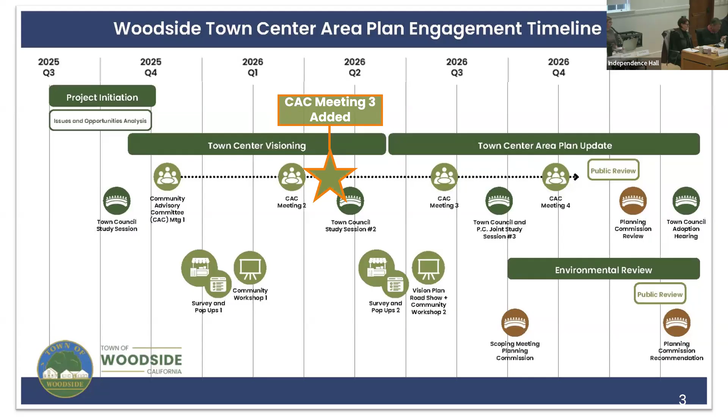Daniel: So I have one topic that I feel is a bit of a miss for this list that I wanted to put in front of the group. I attended one of the council meetings in January, and an organization called LAFCO, an arm of San Mateo County that audits the health of the towns and cities, presented on the health of Woodside.

On the financial side, our budget is about $12.5 million a year. 51% of our budget comes from property taxes, which is really unusual in the county—that's normally 15 or 20%. There's not a lot we can do about that revenue source. Our next biggest revenue source is permitting and fees. We have very little sales tax, very little business taxes, and no hotel tax that most other towns make a lot of money on.

So why do I bring this up? Well, our police services cost $3 million a year and are projected to grow way faster than our town revenue. LAFCO raised an alarm that by 2030 we may be looking at a $1 million shortfall in our budget, which is kind of where Portola Valley is right now, where they're in financial trouble.

So the question I had is: should one of our desired outcomes or goals for the town center project be to focus on having the town center generate revenue for the town as a priority? Is that a way to close that gap that's inevitably coming—if not in the next four years, certainly within the scope of this project?

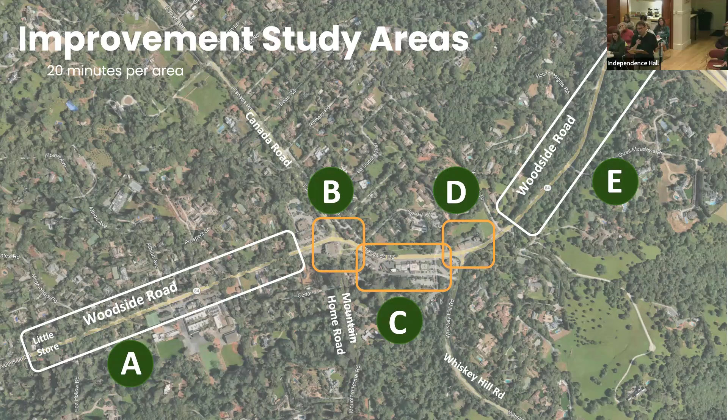But we'll start off with West Woodside Road, Section A. Important thing to keep in mind, and Sage mentioned this earlier, these are long range ideas. There's a whole process before anything gets implemented where they survey, look at where the utilities are, where the property lines are in great detail. There's a whole public process that goes with actually implementing these ideas.

But we've put together vision concepts—the big idea—and we'll decide which of those seem to make sense. Projects are ideally funded by grants, town public works capital improvements, or Caltrans. We are trying to keep investments from falling on private property owners. Implementing these will require additional analysis, review, and sign-off by Caltrans. And we want to partner with landowners as much as possible to facilitate ideas that work for everybody.

So we'll start with Western Woodside Road, which spans from just past Little Store, past the church, all the way up to Roberts. It's an interesting stretch of road—you have 2 different conditions for the bike lanes, a varying condition on the sidewalk on the south side, and the shoulder takes all kinds of different forms on the north side.

Like Woodside, it's very unique, so it'll have to be studied block by block in a lot of detail. But there were some sensitive areas revealed when we talked to the community, and that really pertained to the school, the little store, the church, and coming up to Roberts.

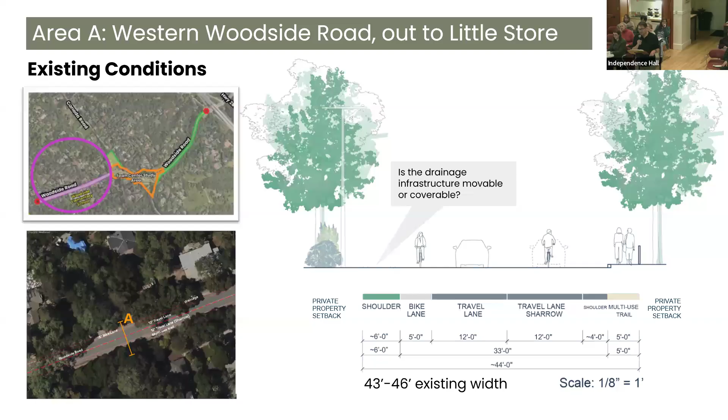Right now, it is somewhat of an unsafe environment for the elementary school students. Vehicles at times do go over the speed limit and speed down this corridor. And there's a lack of parking for the commercial uses at the church and at Little Store.

Some of the CAC feedback we had before was that elementary students, pedestrians, and bicycles were tied up as the top priority to fix. And we want to really fix the speeding issues along that stretch of road.

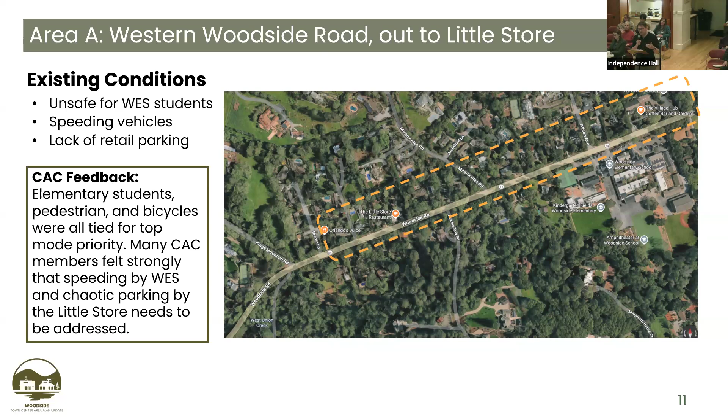Some of the broad ideas here start with the pedestrian experience. How do we improve things on the north side, and then how do we improve things on the south side of the street? In some areas around the school, things are already fairly nicely improved, but heading west from the school, things get a little irregular.

So we're looking at really formalizing the pedestrian and equestrian improvements along this corridor: enhance the existing path on the south side, and look for opportunities to create a new multi-use path on the north side. In and around the school zone, we have a couple of different concepts that are additive — you can do all of them or just some.

For traffic calming, your city has already done quite a bit to start, with high visibility crosswalks, rapid flashing beacons, a bike lane on one side, the posted speed limit, and we noticed tonight there's a speed check digital readout, which is really great and very helpful. So the first concept is to bring it up a notch.

Narrow the lanes to 11 feet wide, which is not an uncommon dimension for vehicles to travel. It narrows up the feeling of the road a little bit, so people tend to drive slower in those environments.

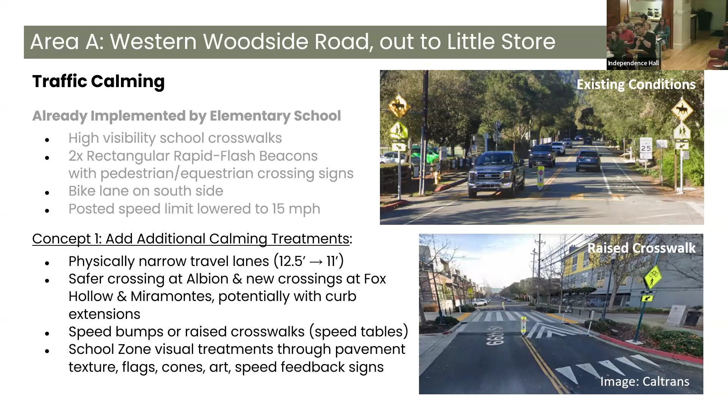Concept 2 is to really formalize the multi-use trails on either side of the road. This will take careful study on the north side to look at where the power lines or power poles are, where there are big trees or not, and the drainage. That would take a lot of study, but it would be a great long-term goal for the city to achieve pedestrian safe travel on both sides of the street.

The south side, on the side of the school, is actually quite implementable — it's not far off from where it is today. So I think that's a good thing.

If we can buy ourselves some space, take some space away from the cars, and get two dedicated bike lanes — it wouldn't be for the entire length because there are some really old trees that encroach and narrow the roadway. But beyond those trees, closer to the school going west, if we could implement dedicated bike lanes, a cyclist would have a symmetrical street layout — they'd know they're going one way on a dedicated bike lane and coming back on a dedicated bike lane. It's just a clear use of the street for them.

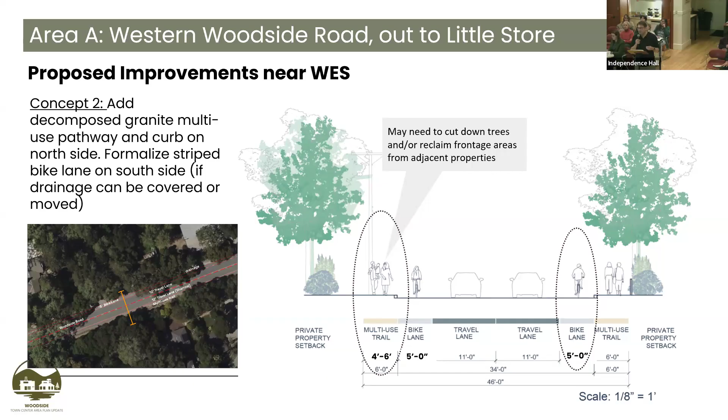Little Store is a great asset for the community, providing services without going all the way into the center. Right now there's a nicely defined parking lot off the street, but there are some ambiguous zones on either side of the store that could be parking — or maybe not. There are wood stumps, signage that says no. So going through a process to really define what legally is in the public right of way, what can legally be used as parking for the store, and trying to make it easy and safe for cars to park, while also dedicating space for bikes to travel in dedicated bike lanes, would be a worthwhile effort to clarify all of that.

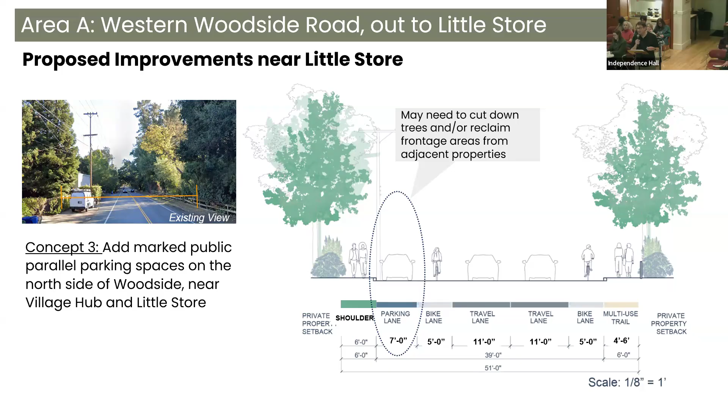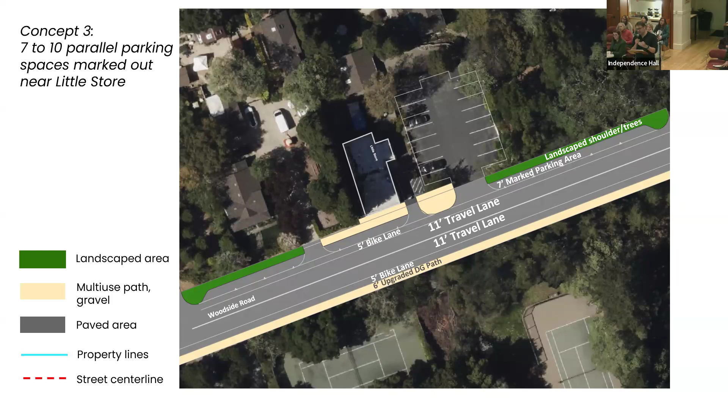So this shows in plan kind of what we're thinking. Little Store's there in the white outline with the parking lot to the right, and just creating a more formalized sidewalk or path environment. Have clearly defined parking, and then narrowing the travel lanes to 11 feet gives room for a 5-foot bike lane and 6-foot upgraded DG path on the south side. Next slide.

So before we jump into the next session, I thought it'd be good to hear from all of you on this. What are people's initial reactions to the concepts? Share with us what you're thinking. Carly.

I'm all for anything that makes it safer for pedestrians and the students and bicyclists and stuff. I do have a question from one point on one of the other slides. It said implemented was posted speed limit lowered to 15 miles per hour. Is there an update about Caltrans and lowering the speed limit near school?

Not yet. Yes, Louis, I'm Public Works Director. The request to reduce speed on Woodside Road in front of the elementary school was submitted to Caltrans. I'll be meeting with Caltrans on Monday and get an update on that, but we did submit that request.

Yes, go ahead, Steve Lubin. Yeah, I mean, I wrote this in my letter, but I'll try to do it quickly. Your diagram shows a 5-foot bike lane immediately adjacent to parked cars, which is really dangerous. And not sure there's actually enough room for bike lanes in this section. And the existing path near the school is really a sidewalk. It's not, state and federal standards call for 12 feet of width for shared paths that are two-way.

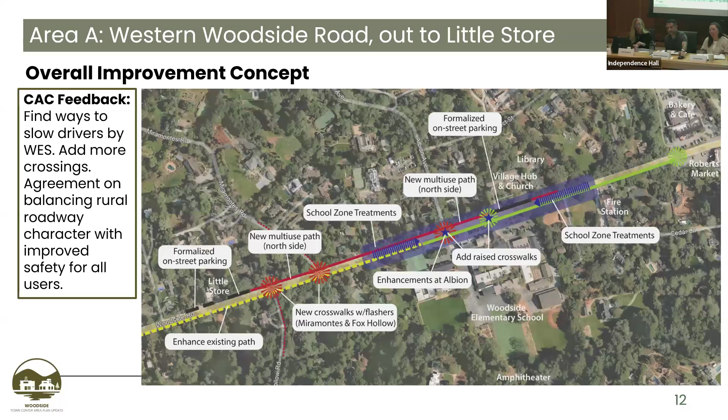Excellent. We'll keep going then on to area 2.

Oh, really quick, Troy, do you think we should do the vote? Yeah, just out of curiosity, do a quick show of hands for everyone that supports the north side path.

We can do a priority list, maybe. Yeah, it's just interesting to see. Totally, $5 million, right, it's a maybe. Well, absolutely, okay, that's good feedback.

I think we have pretty good support for the first concept, the street calming and slowing down. How about the last idea, the marked on-street parking? How many hands for that one? Most. Great, okay, perfect. Thanks, guys.

All right, next area: Woodside Road, Cañada Road, Mountain Home Road. This is one of the major arrival points in the town, and it's a slightly organic intersection. I think 100 years ago it was probably a lot slower and easier to navigate, but there's a lot more traffic now that doesn't necessarily live in Woodside but goes through this space, so there's quite a bit of activity here. We're looking at a way to create more visual clarity for pedestrians, motorists, bikes, or horses on where they should actually be in this zone. Let's go to the next slide.

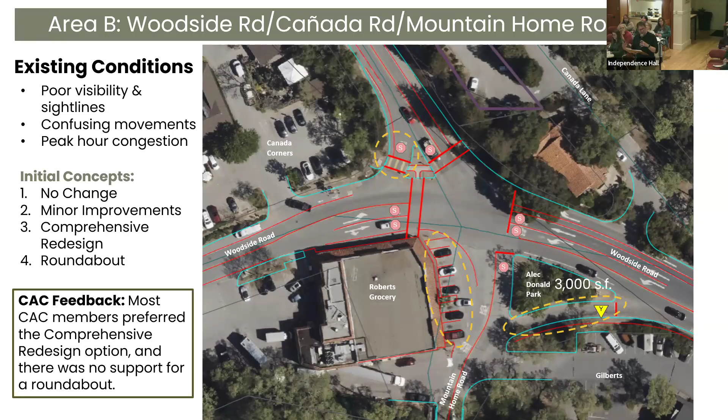We discussed some initial concepts in our last meeting: leave it alone, minor improvements, comprehensive redesign, and a roundabout. The roundabout was not popular; comprehensive redesign was. So we moved forward with different ideas for a comprehensive redesign. These aren't complete, finalized concepts—they came out of discussions with all of you, and we should beat them up tonight. Some of you have already provided really constructive, helpful comments in your emails, so let's keep those going and talk about them. Next slide.

The first one is a minor configuration, with some optionality. One thing very clear from the community outreach was people weren't excited about the slip lane off Mountain Home Road—as you get into that lane and make a right, you're still worried about traffic coming down Woodside Road. So making the right turn only happen in one spot, where Mountain Home touches Woodside Road, seemed like a consensus move. It also opens up a lot of land, since we're taking that square footage where the slip lane was and can now orient it for pedestrians or public space.

What we have here is option one, where we leave the center line of Mountain Home Road alone. Traveling Mountain Home is the same as today, but on either side we've clarified where pedestrians belong and where cars belong by creating well-defined sidewalks. There's a loss of a couple parking spaces right in front of Robert's Grocery, but we put them across the street and added one.

We've also added crosswalks connecting an expanded Alec Donald Park, which doubled in size from about 3,000 to 6,000 square feet. Now we have crosswalks carrying pedestrian traffic along Woodside Road all the way to the corner of Robert's Grocery, where they can cross Woodside Road over to Cañada Corners—a simple, no-brainer pedestrian path, which is what we're shooting for. And where Mountain Home Road engages the parking access for Gilbert's, we've created another crosswalk, so there's a nice pedestrian loop.

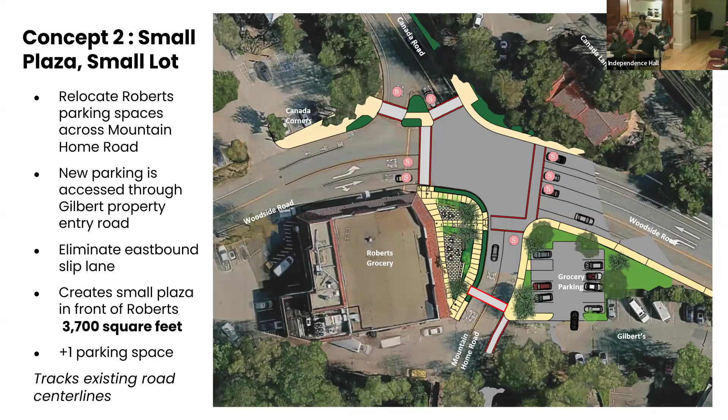So this is just a quick sketch of how that would kind of feel and scale. It's not insignificant in size for a retail environment plaza. Sometimes having something that's a little smaller can actually make it feel a little more bustling and vibrant. So that's kind of the concept there.

Some of the challenges that were noted with this is now the carts are going across the street, and that's the big obvious one that's quite problematic.

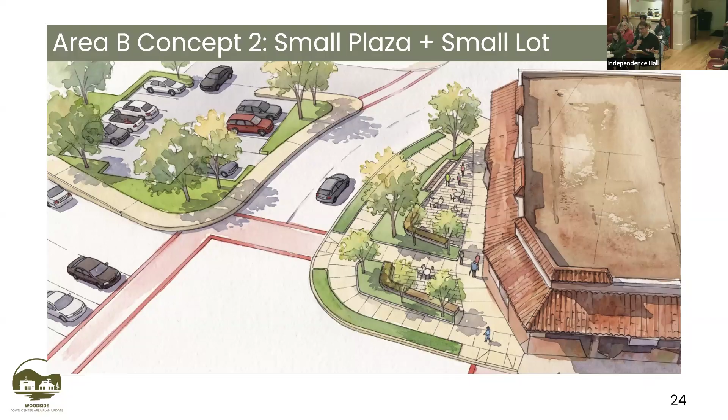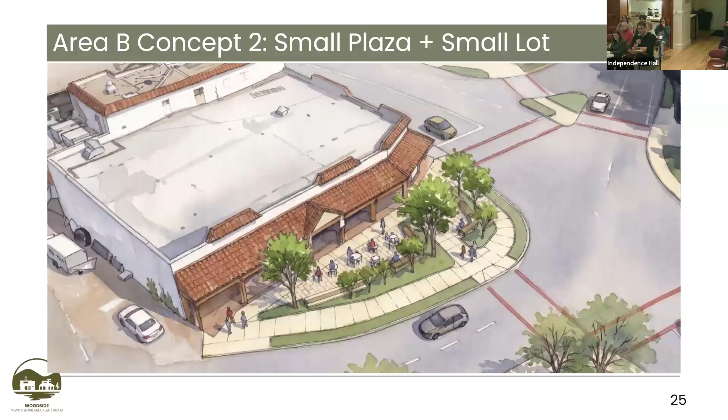So next slide, and this is a different view of that. Again, the idea behind this scheme, the previous scheme, was if we're not changing street alignments, maybe these are a little easier to implement. But the next one, we tested that theory based on some concepts that Steve provided.

And then Alta, our transportation consultant, took those ideas and worked with some of the constraints that we revealed. So this was a concept where Mountain Home Road actually curves - imagine widening the slip lane. We take the slip lane that's there, widen it into a two-way street, and then align it with the Cañada Lane intersection in terms of creating one crosswalk, one simple intersection there.

And then the interesting byproduct of this is you create this Alec Donald Plaza that's about 6,000 square feet, so it's double the size of the previous one. And then you really tighten up the intersection where Cañada Road and Woodside Road come together, so now you've got just a very simple T intersection. Traffic movements are much simpler there, and the pedestrian crossing zone gets much smaller.

So we're able to move the curb out, and the area that says landscape on the right side of Cañada Road is a substantial expansion of that land area there. So there's some interesting opportunities in terms of people arriving at Cañada Road - there could be a really great signage moment at the park. The landscape area on the other side of the street, they start to create a gateway on both sides of Woodside as you enter the commercial core. And so let's go to the next slide.

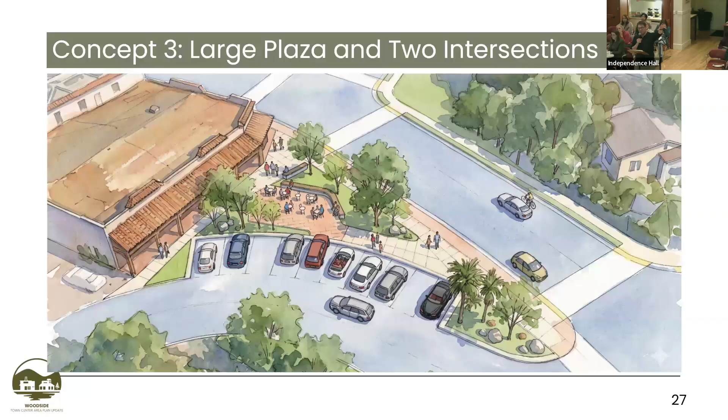So just to give you an idea of how this feels in 3D, this one retains the pull-in parking, just off to the side instead of directly in front of the store. It introduces a second stop sign and intersection, so you'd have Cañada Road and Woodside Road, then Cañada Lane and Woodside Road, both with stop signs. This works with the idea of slowing down traffic on Woodside Road up to Whiskey Hill. That's the other view looking from Cañada Road.

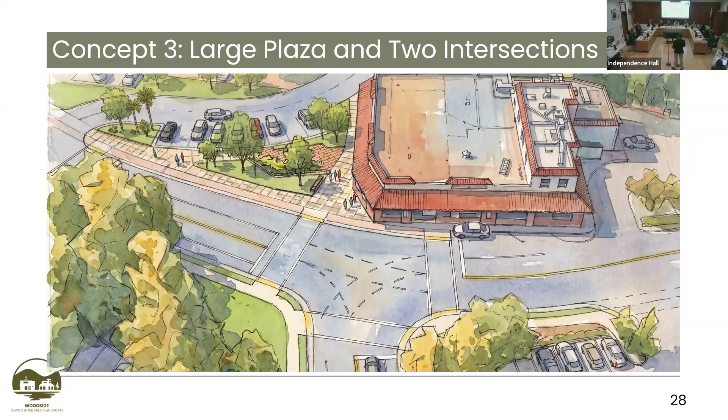So these are the three options next to each other. Concept one is about 6,000 square feet, across the street. Concept two has the Plaza hard up against the Roberts Grocery, but no changes to the street alignment. Concept three is a major surgery where we reroute the road, but reveal the opportunity for a large plaza directly adjacent to the grocery store, and also maintain the pull-in parking.

When I'm looking at this, I can't stand it, by the way. I'm thinking about this serving a lot of people that don't live here. This is the people that live in Woodside. To think there'd be a big park there with people throwing their paper down and their sandwich they didn't finish eating and all that - to create something like that in the middle of town, you think that's a nice thing? I don't. I just don't. I think it's stupid. Sorry.

I'm not sorry. Public open space does exist in a lot of towns. But where I'm going with this is you're absolutely right, they require a lot of care, maintenance and attention. They're not free, they require a yearly budget, you have to take care of them. There's a lot of discussion on both sides about what their value is to the community, how they're used by residents and non-residents, and how they either generate or don't generate business and value for nearby properties. So I think that's what we're here tonight for, to hear your thoughts on these ideas. There's always option zero, which is leave it exactly the way it is. So let's keep talking, I'll stop talking. You keep talking.

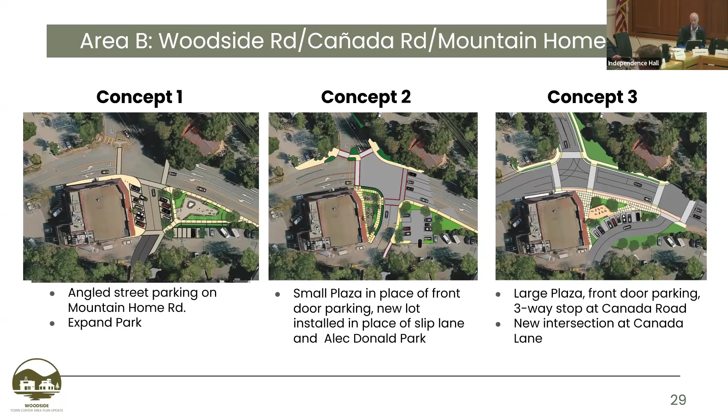One consideration in this concept 0, which we could add, is that in concept 1, you can actually leave the parking adjacent to Roberts as it is. That's the existing street right-of-way, and you don't have to add the parking on the park, though it might serve folks that want to spend time there.

The big question I'd like to hear back from all of you on is whether it's important to have a crosswalk going from the corner of Alec Donald Park along Woodside over to the crosswalk that leads to Cañada Corners, going across Mountain Home.

Troy, do you want to just drag the cursor on it? So, here's where right now we've taken out a parking space to open up visibility, and it also allows a crosswalk to come across there. At a minimum, you could leave the slip lane, making a right onto Woodside.

This one already still has the slip lane going on at Cañada. You could have the 3,000 square foot Alec Donald Park, but you could have a crosswalk that gets people along that frontage, and then do a proper crosswalk at the slip lane for pedestrians, so there's a clear pedestrian path along Woodside Road. That might be option 0.

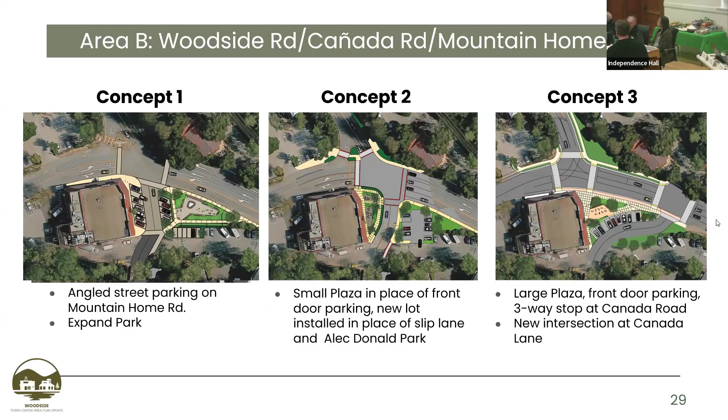Troy, can you go back to the plan for 3 that has all the stop stuff on it? So your question, Steve, is the stop sign necessary where Mountain Home touches Woodside? Exactly, the eastbound on Woodside Road—is that stop sign necessary since it's so close to the intersection? It seems like you have a short stacking distance there back to Cañada Road.

Eliminating it wouldn't make it a lot more dangerous. Well, then I don't know how you'd get out of Mountain Home Road, right? You'd have to wait. You have to wait for a gap that's caused by people taking turns at the intersection, which is close by.

That's an interesting idea, actually, that could be looked at. But I think that, and Sue raised it too, the movements of people on Cañada Lane would not be something we'd want to encourage with this concept. So if this concept were to move forward, I think we would want to address that.

Certainly, we have like a left and right only from Mountain Home, so you can't cut through Cañada Lane, but you might have to do that on the other end as well, so folks wouldn't cut down Cañada and then take the left out. So I think this could use a little refinement, but there is a scenario where I could see no stop sign on Woodside—that would again be a trade-off of throughput versus connectivity.

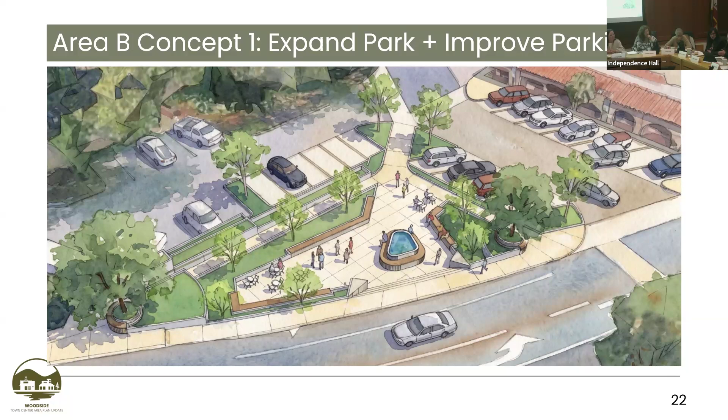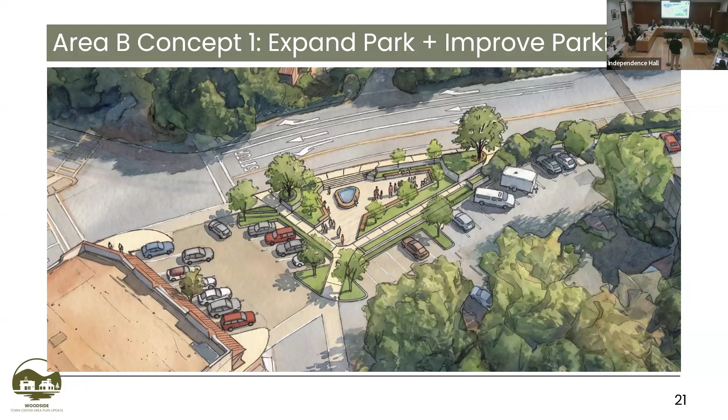And it seems that the crosswalk coming from Cañada Road side to the Roberts side, if it was pushed further east, so that the cars actually stop closer to where Mountain Home Road intersects, it kind of gets rid of a little bit of the blind spot. So they're pulling up much further, kind of where the mailbox is. Is the mailbox still there? So the crosswalk from the island at Cañada Road and Woodside Road intersects much further east, so the cars actually stop further east. So when they look to the right, they're actually looking down Mountain Home Road rather than having a blind spot.

That crosswalk there, move that to there. I do think it's important to have the crosswalk on the south side of Woodside Road. I don't know, I think people can walk around to get up. They don't need a crosswalk necessarily from the Alec Donald Park corner straight across. I mean, it doesn't get you anywhere, it gets you to the baby Jesus thing. It's just not, it gets you nowhere.

So the really neat thought you're sharing here is taking that crosswalk over to Cañada Corners and shifting that to the right, so the car stops further, like right there, and that crosswalk comes down. That's a huge improvement, that's a really beautiful idea, I like that a lot. And that wasn't my idea, that was Steve Patrick's idea. We'll call it the Steve Patrick Crosswalk.

Anyhow, I think what we need to do is go back and create an Option 0 that restores the 90-degree parking in front of Roberts, but creates a safe zone for a crosswalk, and then rethinking the position of that crosswalk that goes over to Cañada Corner so the cars are coming a lot further into that Mountain Home view corridor. That would be really cool.

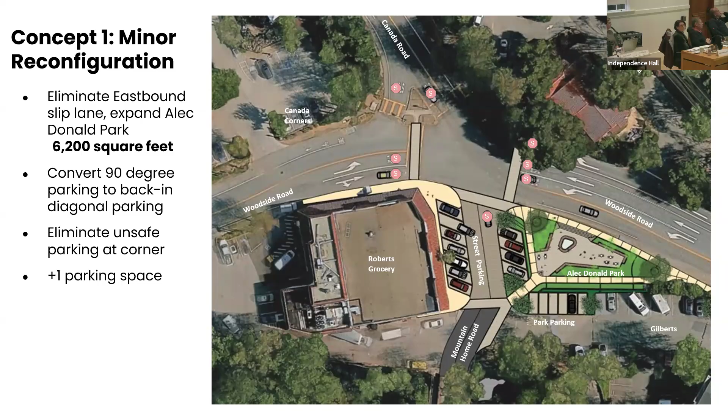Well, we do have a couple more things to talk about, and what's interesting is these concepts can work together. The shared street concept we're going to cover next, which Richard turned us on to, is a really interesting concept that could work really well with the lower crosswalk. There's a process where we're going to go through more steps about which ideas survive the next stage, and as we see which ideas survive for each area, we'll look for those pieces because we can pull ideas from other schemes that don't get picked and match the successful components to the overall vision. So if we do end up looking at that shared street concept, that lower crosswalk might be relevant.

Okay, so we'll go to the next section.

Quick vote. Is there any merit in not taking a vote, but instead directing Good City Company and Urban Field Design to go back and tweak concepts 0 and 1, then present those two concepts to the CAC, ask for a quick vote back, allowing you all to go to the town with updates on those two concepts, together with perhaps concept 2 and 3 and the vote.

Sure. We don't need to make a motion here, but it sounds like the general agreement is for us to create a concept zero plus that does the littlest possible to enhance safety. We'll keep some of these other ideas alive to show council that we've had the discussion, but I think the group here is expressing support for a new option that we can create and bring to council.

I think we'll modify option 1 to show the 90-degree parking, restore as much of that as possible, and then have the parking and the shifted crosswalk that Steve Patrick brought up. And then option 0, we'll just look at some minor touches, perhaps moving the crosswalk as well, that Steve mentioned, to improve the visibility, but retain the slip lane going towards Whiskey Hill off of Mountain Home. So that will be the first option, or zero option.

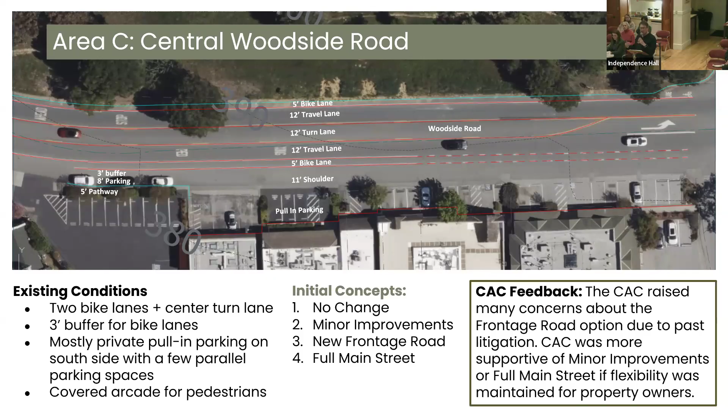The more we looked at it, the big changes are really, really hard - hard from a financial perspective, hard from a civil engineering perspective. So what we've done is we've developed a concept where the question is, if a landowner came to the city and said, I'm going to provide parking on my site in a different form than pull-in 90-degree parking stalls off of Woodside Road, what are my options? In the next slide, go ahead.

We looked at what would happen if a landowner elected to remove that pull-in parking - what would the impacts be on the overall environment? In this intermittent sequence, where say two landowners decide to utilize that land for redevelopment - and I think these buildings have been improved upon fairly recently, which Richard, you pointed out - so the likelihood of redevelopment is a speculative thing. But in the event that one of these does in the future, how would we guide that vision?

Is there an option where you could create a Main Street if the landowner elected to not have that pull-in parking and go with public parking along the curb, then provide the other parking they need internal to their site, which of course comes with costs and all those things. So let's go to the next slide.

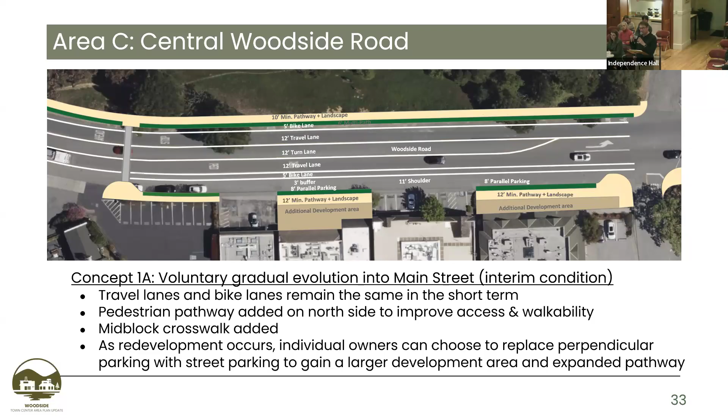So assumptions: streetscape and pull-in private parking only evolves if owner voluntarily redevelops and opts into the new parallel configuration. This goes back to that second slide, which talks about what options we can give the owners. So if an owner is going to explore residential uses on the second level or new development, this could be an option we provide them - to reconfigure, get more land for the building, and reconfigure the parking. The new developments are parked to code requirements on site for parking demand.

And parking on the north side of Woodside Road can only happen if at some point the entire street's transformed and the center lane is no longer needed for pull-in parking. So there's a lot of really big ifs. Richard wrote a beautiful letter that outlined in a lot of detail some of the constraints and impacts a developer would have to go through in order to get to this outcome.

This is something we heard over and over again from the community feedback, a desire for a formal Main Street in Woodside. I think we can share with them the constraints and the difficulties of that, but we can also share that it is technically difficult, but physically possible.

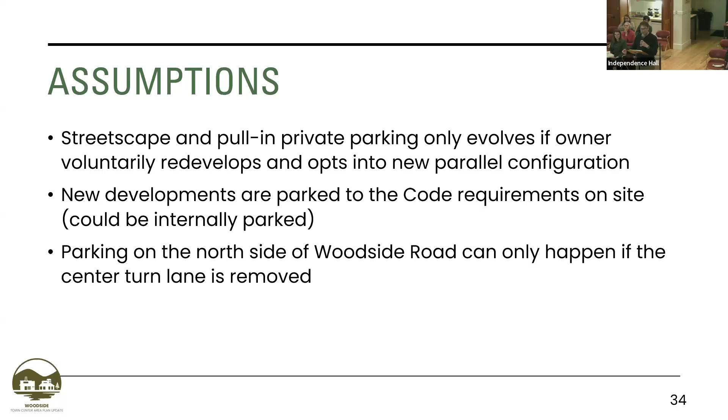This assumes each property has forgone their pull-in parking off of Woodside Road and converted to a parallel parked condition. At that point, the turn lane off Woodside Road would not be needed, and you could achieve a formalized, more regular Main Street with parallel parking, a 5-foot bike lane with a 3-foot buffer. So you'd have parallel parking at 8 feet, then two 12-foot through lanes, then another 8 feet, then 7 feet for parallel parking, and a pathway on top.

Next slide. This would be your arrival moment into town. Again, these are all measures to help slow and calm traffic going into the town. The purple boxes imply that property has been redeveloped. It could apply to all of them, but this is a very hypothetical concept. We're mostly looking at whether this is an option you would allow a developer to pursue if they own that property and want to change that street parking format, and if they did, what would you ask of them in return in terms of sidewalk width, planting, and things like that. Do you have a guess, if I own one of those purple boxes, what it's worth before and after this change?

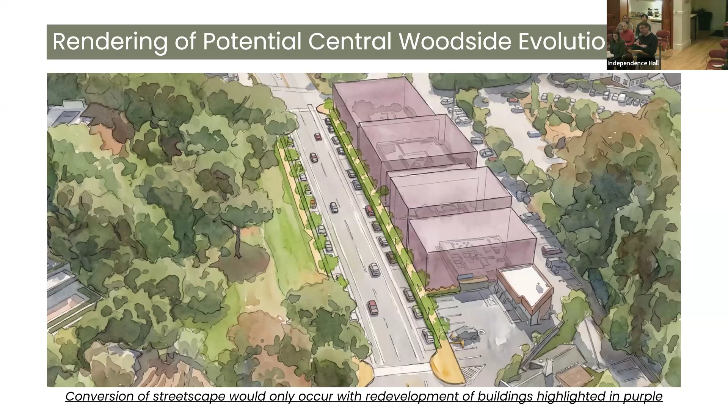But that's kind of the case study for that kind of development pattern, but it's really uncommon. So we wanted to put this out there because it was something that did come up with the public. And I think it's important to qualify the idea with what the real constraints are. I think between your contributions and what we've done, we've kind of outlined how hard it is. But this is what it would look like if that development was achieved over time.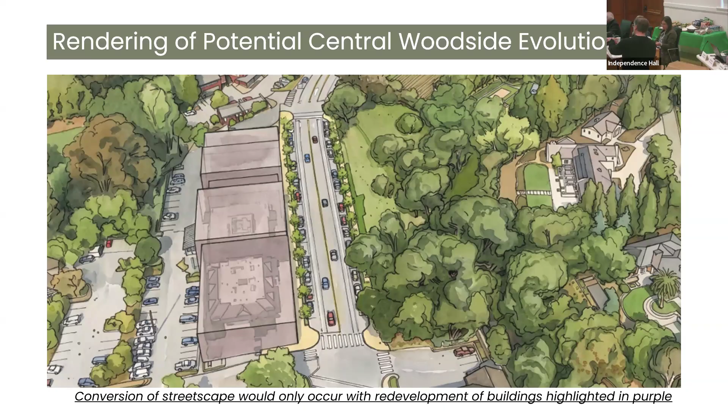So that's kind of the base of it. The next concept is not an either-or. This is something that could happen tomorrow, I think. So let's go to the next one.

And so this was a really interesting idea that came from several stakeholders. We discussed it first with Richard, and Troy and I were walking it tonight, and we did some updated exhibits. But essentially what this imagines is the back side is almost the second front side. And several of the commercial buildings have created facades and entries that are on a quiet creek without any of the traffic noise impacts of Woodside Road. And it connects Town Hall better. And it ties you all the way to Robert's Grocery. And gosh, that crosswalk might make sense if you get all the way over there.

So this concept here basically hinges on, I think, a really important idea. And if you see that red line that's kind of halfway through the property, that would cut off the through traffic circulation to really quiet the street to vehicular traffic. So that would cut it off to cars and trucks, but not pedestrians and not bikes.

Right. Yeah. And horses. Horses, correct, correct. Those three get through.

So the idea is that if you eliminate the through traffic for vehicles, the only folks driving that shared street are the folks that happen to be parking into those spaces. So the cutoff point, though, would have to be accessible for emergency vehicles that would need to get through. So designing that gate carefully, and we're looking at it today, maybe the gate angles this way. There's some different ways to do it. So Troy, let's go to the next slide.

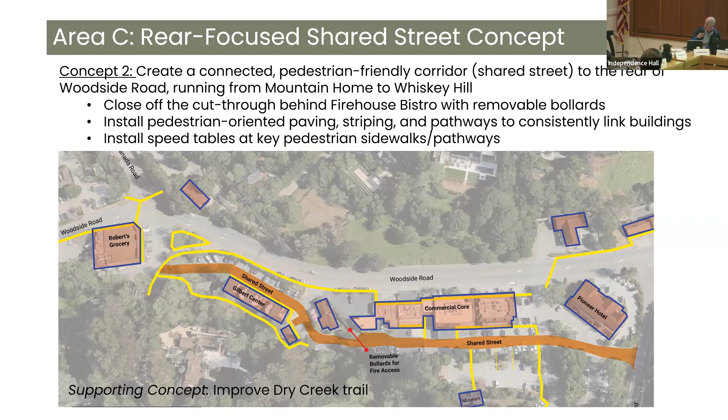Final comment though. With retail leasing, drive counts count. You don't have drive counts in Woodside, and you never will. You have demographics, you have income levels that support robust retail, but you don't have drive counts. And drive counts matter everywhere in leasing in the United States. I've been at it for 45 years, so I've seen it done. It can be done, but it won't be done here. You just don't have the population, the density, and the drive count.

Dan, the other agenda with this concept is if you cannot achieve the formalized pedestrian sidewalk that creates continuity on Woodside Road, can we create continuity in an area that has less friction in terms of cost?

Can you go to that first slide? The most minimal way to do this is to take the center section of asphalt and texture it, and try to take that texture all the way to where it could optionally stop at the red gate, and you take the equestrian trail behind Gilbert's. Or if you wanted to extend this, it could go around Gilbert's to tie into the post office and the uses there. That's an option too to discuss. This ties to the museum, it ties to Town Hall, it ties to the Village Pub. There's a collection of some uses there.

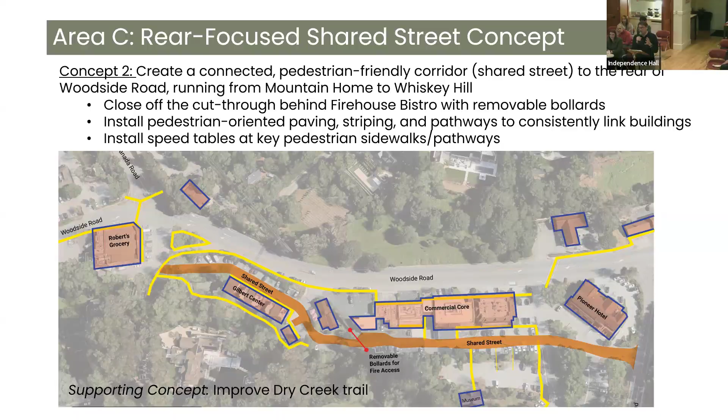We're not proposing any changes to that trail at all in this idea. This idea takes the concept of just changing the paving surface along where the cars drive, not where they park, but where they drive, to create a zone that pedestrians could walk along with slow traffic. So anyhow, just trying to clarify what we're showing. It's clear as mud.

Two more quick comments. One is this concept really takes that back area to where it was prior to the town's approval of Gilbert Center. The town obligated the Gilberts to remove that retaining wall that then blocked traffic from exiting Gilbert Center and heading east. That was created at the direction of the town, but it didn't really matter at the time because there was a retaining wall behind the pub that held traffic westbound, and eastbound at that west side of the pub. That was removed when the town approved the pub and created this throughway.

At times it may be infrequently used, but at times it's really heavily used. School times in particular see a lot of cut-through traffic, and it's sometimes high-speed. So we added engineered speed bumps, approved by the town public works department after review, to slow things down. Some of those vehicles are pretty heavy, and they take those speed bumps at speed. They don't care, so they fly over them. It's not pedestrian friendly, in my opinion, now. So the idea is let's make it more pedestrian friendly and put cars back on the road where they should be.

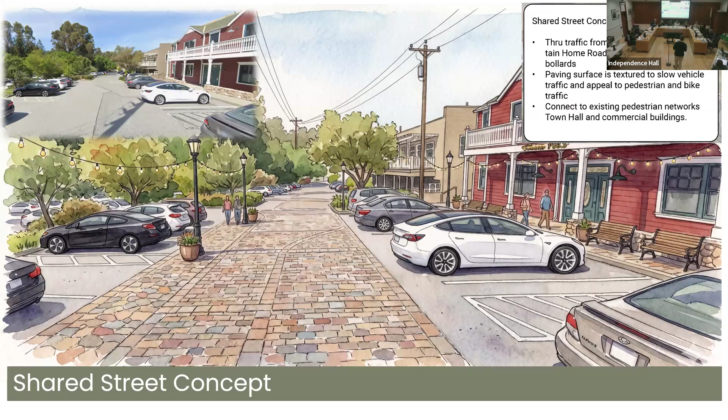Why don't we take a vote on all the ideas and let's go from there. I think we've had some really good discussion, but let's just lay out these ideas. We have a couple of ideas that are not necessarily contradictory - I think some of these are complementary, but let's just do a quick show of hands because I think Leanne's supportive of this idea ultimately. Let's start with the front side of Woodside Road - do we support allowing developed properties to change their parking from the 90-degree to on-street parallel parking? Do we support that, yes or no?

Not so much. All right, got one timid. You lose too much parking. Well, we're not losing parking all over, but actually, I was wondering - how do you suggest people get from the parking on the north side of Woodside Road across Woodside Road, because we're adding cars there, Steve?

How are people going to run across the road? That's part of the traffic calming - I think there should be an additional two crosswalks here from the north side. The trees should be between the cars. It should be parallel on the north side and back-in diagonal on the south side.

If you are not going to get this retail use as intensely if we lose all this parking - I mean, I think we need it already. And the more parking we can keep on the street, the more we're going to encourage these retail uses.

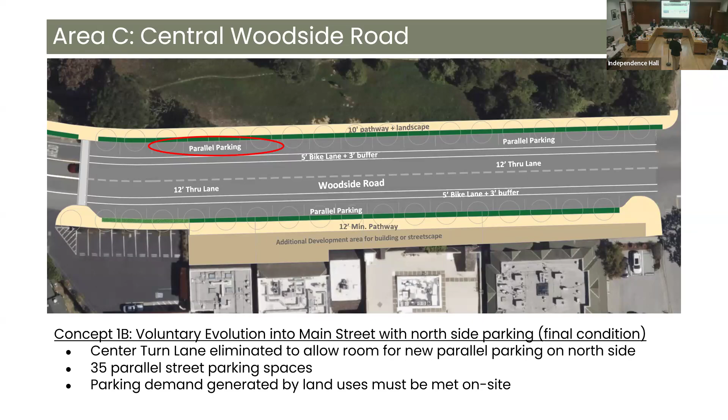Should we just go to the last one? Or do you want to? Yeah, maybe let's just finish out the voting because I'm interested to see where folks are in terms of this. So the first idea, I didn't see any hands really. How about adding - just one hand? Yeah, just one hand. How about adding back parking onto Woodside Road?

On the north side of Woodside Road? At the cost of the center turn lane? That would be the trade-off.

So we would object strongly to that, and it's highly likely if that went through, we'd file suit against Caltrans and the town, guaranteed. We lose westbound access to 2989, the Gilberts lose access from the Gilbert Center, we'd file suit. Okay, we'll take that as a no vote.

No, that's good feedback, but sorry, I agree with you, but I'm gonna object to your approach. He's asking for a vote. This is a public process with people selected to be here. The vote should be taken. I agree with your opinion, but we can't squash the vote.

I agree with your comment, but I raised my hand for a while there while quite a bit of commentary was going back and forth over a number of topics, which skipped the center drive lane. It's been made clear in the exhibits that if that goes, that's the only way to get parking on the north side. If that goes, we suffer damages and we won't sit back and allow that to happen, period.

Recognize that somebody has to say their piece, and then you could take the vote, okay? You would have it to say. I'm not sure that it isn't possible to have left turn pockets and still have parking on the north side.

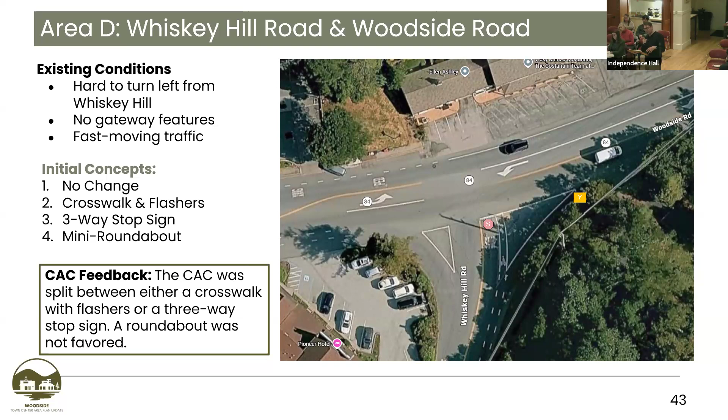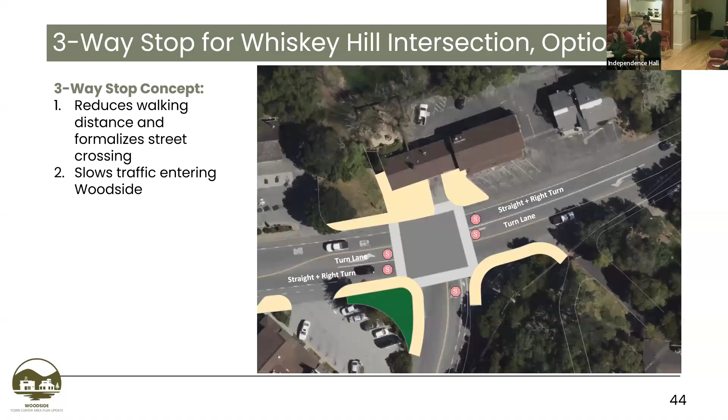So this represents a three-way stop. Essentially what you're seeing on the north side of the intersection is an enter-only lane that goes into that property and accesses the parking in the back through a little tunnel. In this situation, we're creating a moment where traffic coming from the freeway stops, and it will slow traffic before it heads into town. It would make it a lot safer and easier for folks to make a left onto Woodside Road coming from Whiskey Hill.

This was the concept where there were a lot of concerns about roundabout safety, but it does fit the site, a mini roundabout. Basically, with a mini roundabout the motorist is really focused on one oncoming car at a time, so you're not worried about two-way traffic flow, just one-way traffic flow, so there's less to focus on. There's a lot of research and data showing that these modern roundabouts are actually a lot safer and have fewer decision points than both standard intersections and older roundabout designs that weren't as pedestrian oriented.

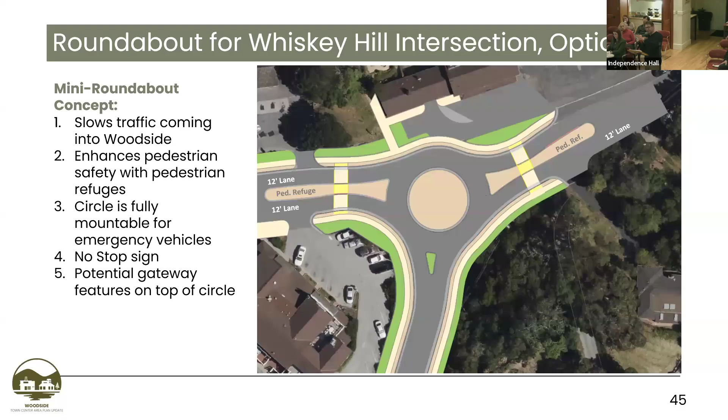These both have pedestrian refuges, and they neck down where the pedestrian crosses, so there's a very short crossing point. This does not require a stop sign coming into town, but it does slow traffic, and it facilitates traffic from Whiskey Hill onto Woodside in both directions easier than it is today. It would also visually reduce the amount of pavement, increase the streetscape, and create a nice gateway moment into the town. So we wanted to show these side by side to compare the two: one is pretty straightforward and traditional, and the other has the roundabout concept.

So let's go to discussion.

Yes, Hassan. Okay, thank you for making me first. I have lots of opinions on this one. This was actually brought to us in circulation years ago, and there is actually a solution on the table that none of these address—Caltrans has accepted it at the behest of Stacy Siebel, who advocated for it. They just haven't implemented it yet. I'll get to that in a second.

My first question is, is that roundabout Caltrans truck legal? Alta designed this so that it was emergency vehicle and truck legal. That center 56-foot fully mountable truck apron is set up so that a truck can go over it without an impact. It's really a graphic, visual cue with a very slight rise in it, so you won't want to go over it, but going over it really isn't a problem at all. But does that mean construction trucks, delivery trucks are intended to go over it because they can't make the regular turn? It's not an obstacle for them—if they have to, their turning radius can work by going over that without tipping the truck over or being an impediment. But that means now you're going to get tire marks and noise. Okay, I'll leave that to Caltrans and design. It seems to me like it may not fit. That's a technical thing—someone has the information to figure that out.

So I do not support the stop sign, because more stop signs through this area—well, again, it will help certain safety things, it will slow things down, and we'll all be hating ourselves on that sunny Saturday when traffic is backed up to the wazoo. The solution we came up with was to add a two-way center turn lane right on concept one, where it says turn lane, but it faces in towards the business next to the gas station. If you're making a left from Whiskey Hill towards downtown Woodside, if you could pull into a center turn lane pocket, you only have to clear one direction of traffic at a time.

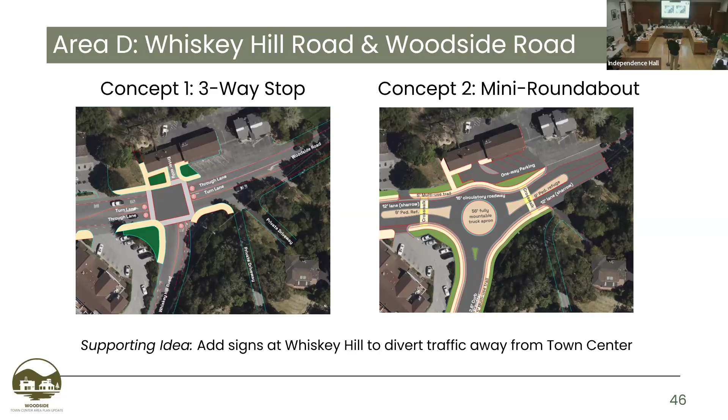Thank you, Troy, anything else? I think that's good feedback. Let's move on to our last area. So this is our last area, I think it's a fairly short discussion. This is basically from Whiskey Hill out towards the freeway connecting to the east side. Let's go to the next slide.

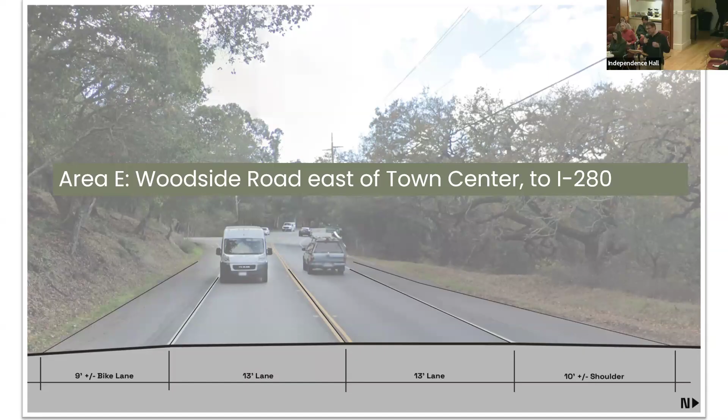Is there another slide, Troy? I think that was just a short one. Yeah, that's basically it. So those are the two ideas—there are limited options in a way on this stretch of road for enhancing the facilities. But if there's interest in exploring the multi-use paved path, a closer look at all those shoulder conditions would determine where it gets really expensive to expand that shoulder to accommodate that movement.

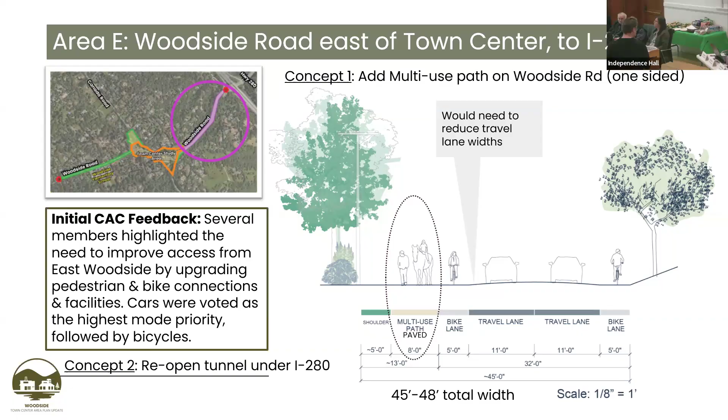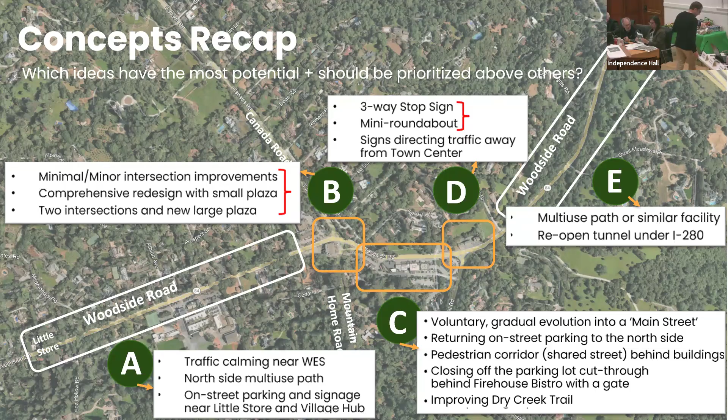All right, well this is kind of all the ideas we put on the table tonight. You guys had some new ideas that we're going to add into the mix, and a couple that we're going to modify and generate new ideas from. So really, really helpful feedback, thank you for that. So I know we're a little over time, but we're just going to do a quick housing discussion and then we'll move to public comment and closing.

So just quickly, I'll use this, it's fine. So just quickly pulling ourselves back over to housing. I know we had a lot of talk about transportation at this meeting and the last meeting, but housing has also been on our agenda. I think we're aware of some of the key issues - there's a lot of constraints, and we were talking about some of them tonight about why properties may not develop or redevelop. We have small parcels, zoning, parking requirements, other restrictions, and the ballot measures which limit your building heights.

As we all know, we're here in part because the housing element asked us to look at housing in the town center, and we took the opportunity to look at parking and transportation as well. But originally, housing was the genesis for this effort. We went out to the community in the first phase, and there were a lot of split opinions, kind of down the middle on housing. So that's where we are today.

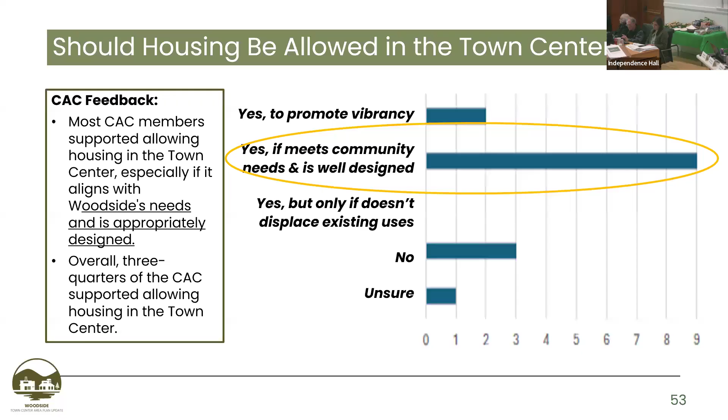We asked, should housing be allowed in the town center? Overall, over three-quarters of you said yes for one reason or another. The biggest reason being the design of that housing being important, and that it's aligned with some of the needs, workforce needs and other needs we were talking about. So putting that back out to the group, that was the consensus. Of course, there are some folks who are unsure, but that's kind of where we landed.

And then those could result in the first step being a potential ballot measure to change some of the current ballot measures in place, that would be a prerequisite for certain types of housing development. There are also options that could proceed with just zoning action by staff or council that wouldn't necessarily require ballot measures, but you could have a ballot measure followed by a zoning change, and then that would result in either the private property owner choosing voluntarily to redevelop under a new zoning regime, or in the case of public property like Village Hill, the town would partner with a developer. Just to lay out the steps: it starts with policy, it goes potentially to the ballot box, then to zoning changes, and then we see development itself. So we're a few steps removed from that.

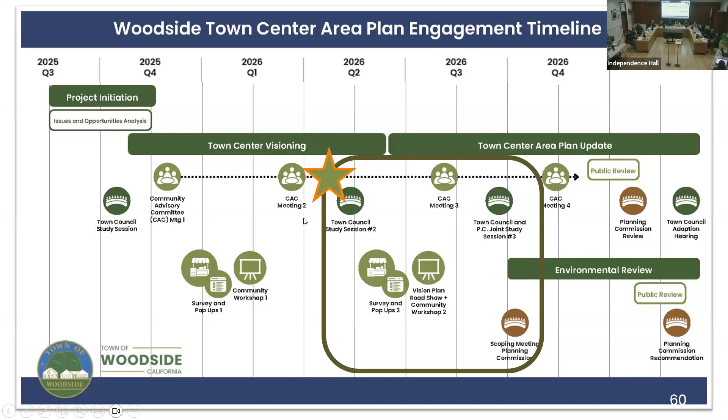And I just want to again thank everybody for coming. And just to reiterate again, we're looking for this—this is a process to create a long-range planning document. It will guide the town with priorities and different programs to apply, so things like outdoor dining and parking standards, and whether there's flexibility for housing, adaptive reuse, or apartments upstairs, or different things like that.

Those are all, again, things that are policy driven. So the final document will tell us if we want to explore these things further, and any zoning changes that come with expanding, making more flexibility for outdoor dining, for different types of uses, maybe removing some of the red tape we talked about in some of our earlier meetings. I always use the example: our code says you need a conditional use permit for an ice cream store.

And so the goal will be, coming out of this document, to then set priorities where we'll start to get down into more of the details on these specific issues. And every zoning code change, and a lot of these items, will be before the public for refined comments and implementation at that point. So again, thank you for coming, and we look forward to creating this policy document together that looks forward for the next 10, 20, or more years.